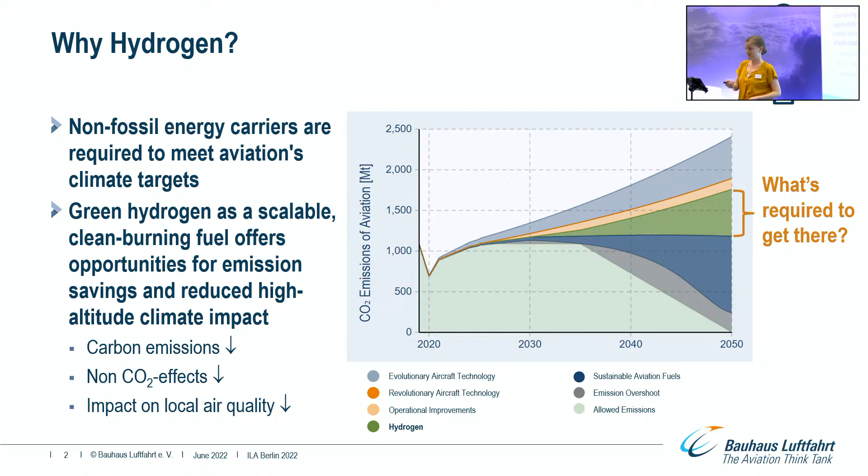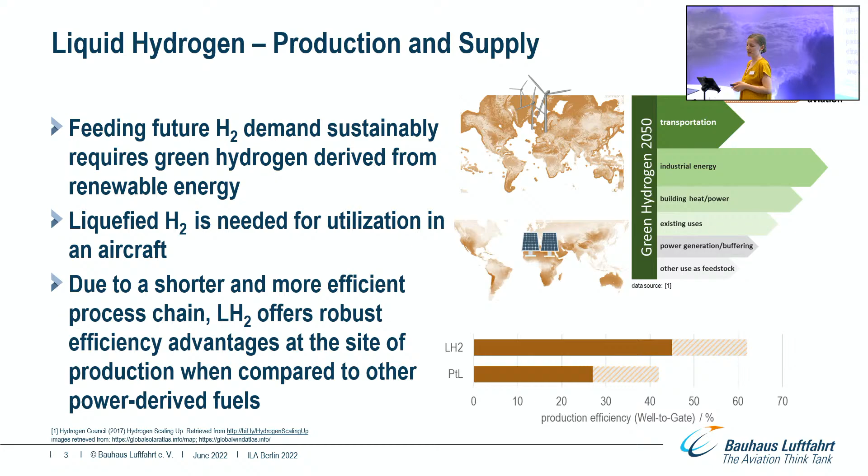What is pretty special though about aviation is that we are aiming to employ liquid hydrogen. Why? Because we require high energy density. So basically, we also need to incorporate a liquefaction step in this production chain, which additionally consumes electricity. Due to a shorter production pathway though, producing liquid hydrogen still typically has an advantage in production efficiency at the place of production as compared to, for example, synthetic kerosene via the PTL process, as you can see on the bottom right.

So now, as we have our hydrogen, how do we use it in aviation? Well, actually, while it sounds pretty simple, this question is quite complex, as we try to illustrate here on the right-hand side, as it has many aspects. So first of all, liquid hydrogen as an aviation fuel has drastically different properties than kerosene. It's a cryogenic liquid, of course, and it is handled differently for that reason. As I mentioned before, it has quite different energy density, actually lower than kerosene when it comes to volumetric performance, which also needs to be considered aboard the aircraft.

So this is not only relevant when we are talking in the context of production and logistics, but of course also relevant when we talk about aeronautic application. So to these two topics, logistics of liquid hydrogen and also application aboard the aircraft, we will go a bit more into detail now. What is important for me to tell you though is that we have to consider all of these different aspects of hydrogen aviation in the context of a broader system transition towards hydrogen. So for having a holistic view on all of these different topics as illustrated here, our team at Bauhaus Luftfahrt brings in a lot of expertise as it's very interdisciplinary and can look at these questions from different angles.

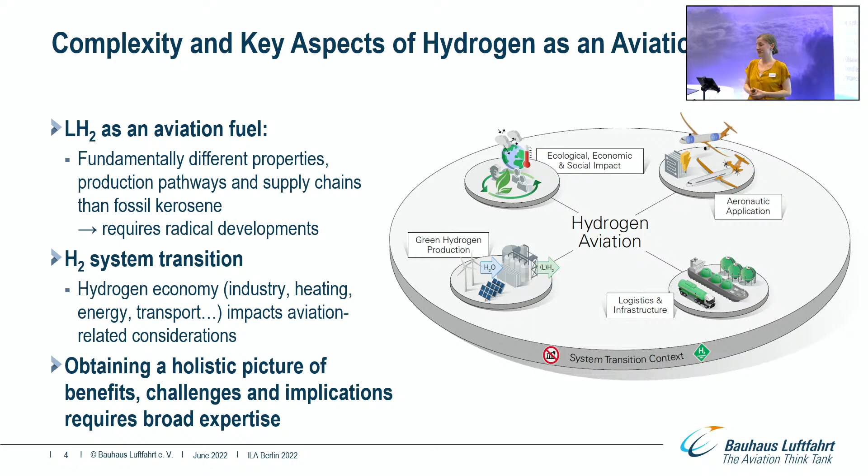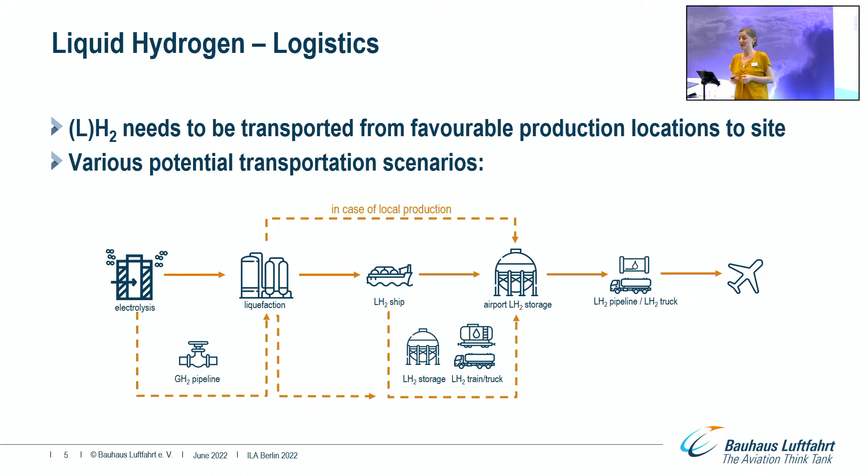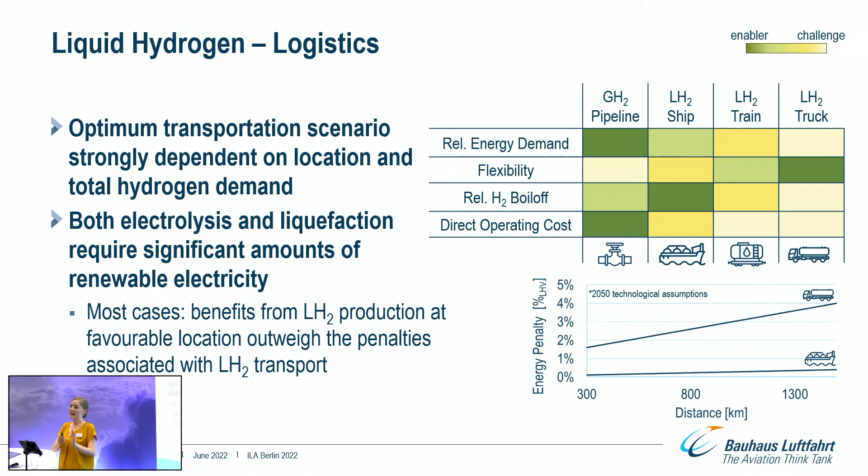However, they differ significantly when it comes to their different properties, and oftentimes we have to consider the trade-offs. So to figure out the optimum transportation scenario, we have to consider, for example, location of the airport and also amounts of hydrogen needed there. Again, as I mentioned, both the electrolysis step and also the liquefaction step take a significant amount of electrical energy. So in most cases that we looked at, it's favorable to actually liquefy wherever you produce and then transport the liquefied hydrogen.

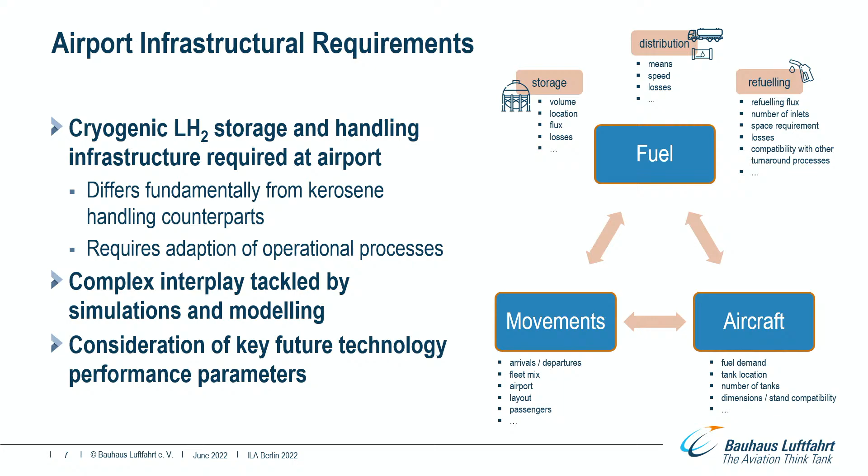So now we have the liquid hydrogen at the airport, but what do we do with it? Well, of course, we need to now store this cryogenic liquid, and we also need to distribute it at the airport and then fuel the aircraft with it. And there are actually a number of considerations that go into that. When it comes to the fuel, for example, storage, handling, distribution equipment, technological development of all of the equipment involved, but also when it comes to the movements and also the fleet development and aircraft development. So when do we need what amount of hydrogen where, basically?

So logically, as it's a cryogenic liquid, all of the handling equipment differs fundamentally. And all of this complex interplay, as illustrated here on the right-hand side of the slide, is actually tackled at Bauhaus Luftfahrt by simulations and modeling to understand what is the impact at airports of hydrogen introduction.

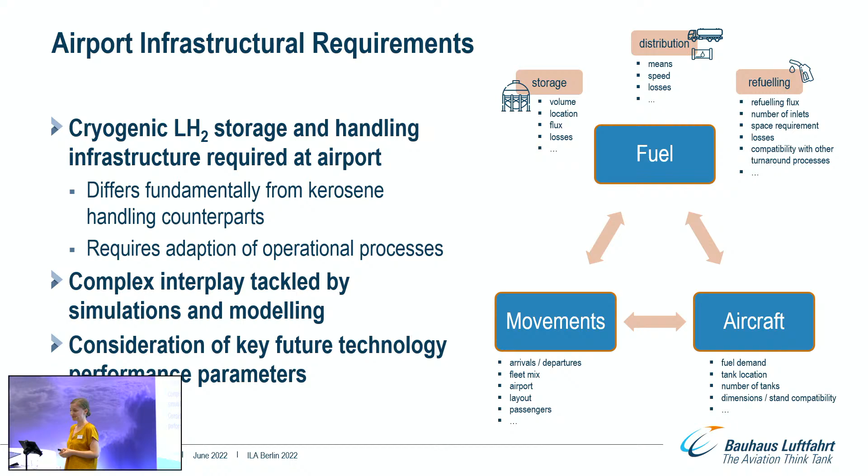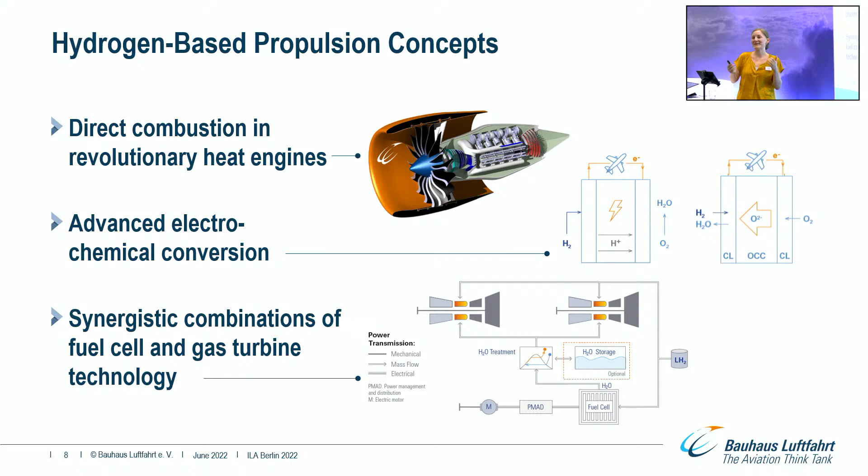So now we arrive at the question: we have this liquid hydrogen in the airport, but how do we use it? Using hydrogen opens up different options of propulsion. We can rely on combustion-based technologies like gas turbines and other revolutionary heat engines, and we can also employ electrochemical conversion like fuel cells. To have optimum performance, oftentimes considering the best synergistic combination of both can be very effective, as illustrated on the bottom.

So now, to use these different propulsion concepts and our liquid hydrogen on board, at Bauhaus Luftfahrt we used our different expertise, put our heads together, and came up with different concepts for every segment, with the main target in mind: how can we overcome these intrinsic disadvantages of hydrogen, as I mentioned, with the smaller energy density, also being a cryogenic liquid, etc., by using synergistic combinations of futuristic technology and advanced technology options.

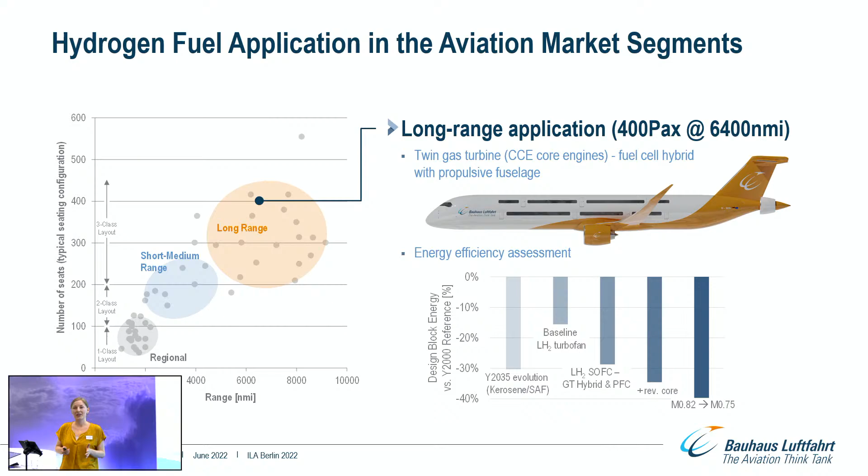So that was a very brief look at our work here at Bauhaus Luftfahrt. As a conclusion, I want to again point out that, of course, hydrogen has very different properties from kerosene, and therefore brings a lot of new challenges to aviation, but it also brings new chances when it comes to emission reduction and synergistic technology use.